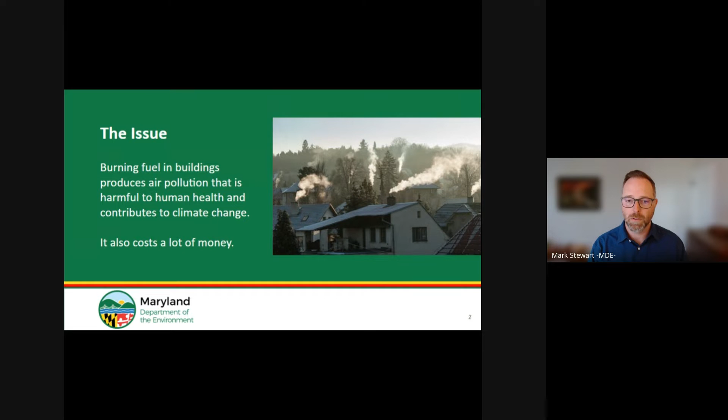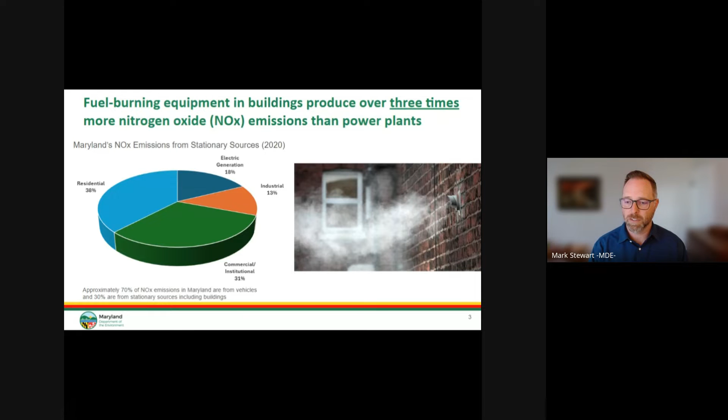And NOx and other forms of air pollution from fuel burning equipment harm children and adults in many ways, including shortness of breath, asthma, lung cancer, premature death, so on and so forth. Maryland is required to reduce criteria pollutants to meet increasingly stringent air quality standards and to protect the public's health.

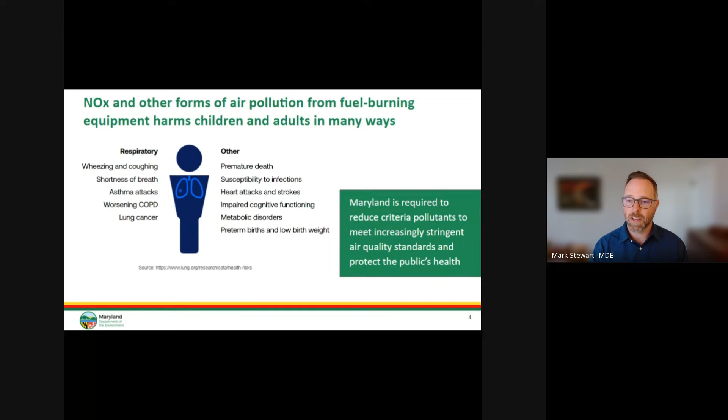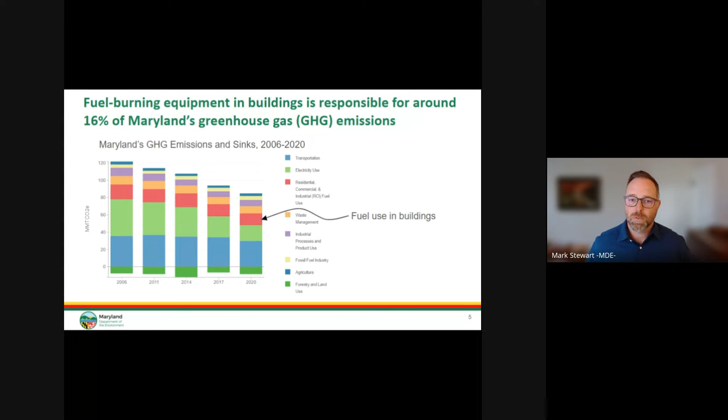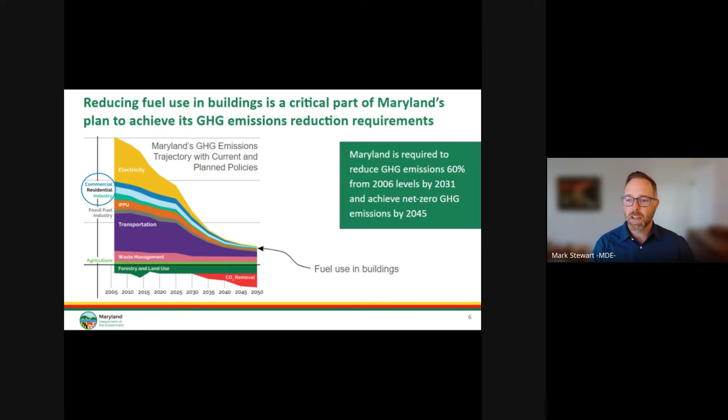Switching to climate change as the focus, we see that fuel burning equipment in buildings is responsible for around 16% of Maryland's greenhouse gas emissions. Reducing fuel use in buildings is a critical part of Maryland's plan to achieve its greenhouse gas emission reduction requirements. The state is required to reduce greenhouse gas emissions 60% from 2006 levels by 2031 and achieve net zero greenhouse gas emissions by 2045.

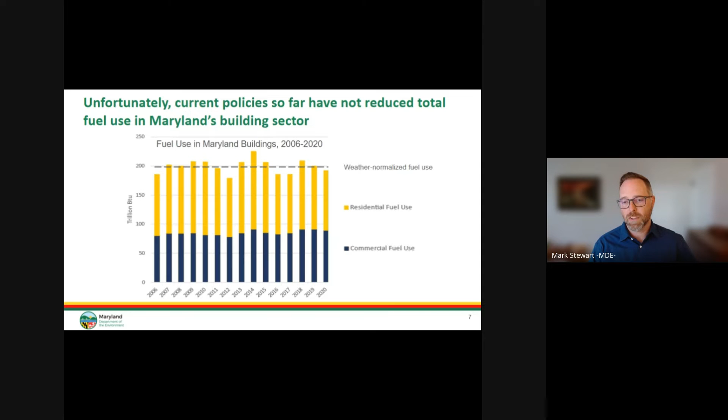And this is why several organizations have called for a stack of complementary policies to help accelerate the adoption of zero-emission technologies and reduce building sector emissions. These policies include clean heat standards and equipment emission standards, among other policies that the state has either already adopted or is also pursuing.

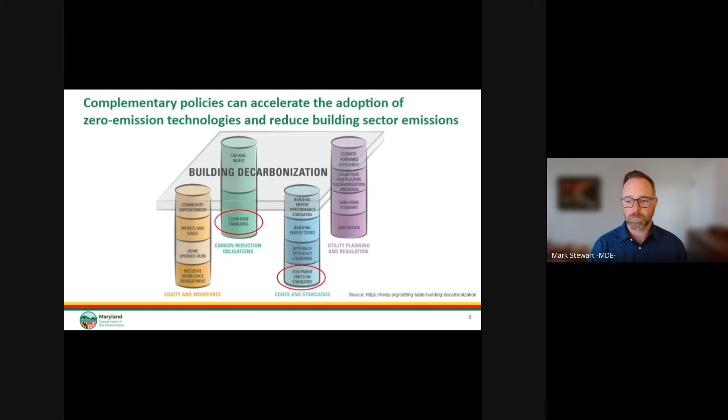These are also the reasons why Governor Moore has directed the Maryland Department of the Environment to propose zero-emission heating equipment standards and clean heat standards. Specifically, he requires us to propose a zero-emission heating equipment standard regulation that will phase in zero-emission standards for heating equipment to reduce carbon pollution and improve air quality inside homes and the ambient air, and propose a clean heat standard regulation to expand Maryland's renewable portfolio standard to the thermal energy system, mobilizing investment in clean heat solutions for homes and businesses.

The Zero-Emission Heating Equipment Standard and Clean Heat Standard address critical policy gaps. When we look broadly at building sector emissions, of course, many of those emissions are associated with the electricity that our buildings use. The state already has clean power policies that aim at reducing emissions from electricity generation, but those policies do nothing to reduce the direct emissions from buildings. We have an EmPOWER Maryland program that reduces both direct and indirect emissions from buildings, but not fast enough to meet the state's climate change goals.

We have a policy called Building Energy Performance Standards, or BEPS, but it applies only to large buildings that are responsible for around 10% of residential and commercial building emissions in the state. No existing policy focuses on small fuel burning equipment, as ZEHES will do, and no existing policy requires emissions to reduce fast enough to achieve the state's climate goals, as the Clean Heat Standard will do. Clean Heat Standard also provides additional incentives to help people achieve BEPS and ZEHES.

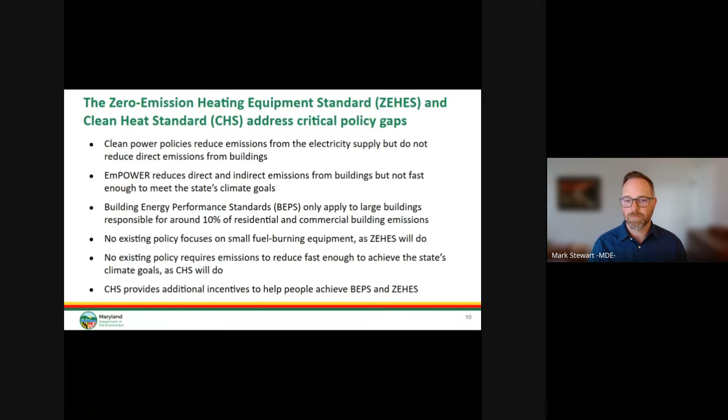So I want to first take a few minutes to walk through the overview of the Zero-Emission Heating Equipment Standards, which seeks to establish NOx and GHG limits for space heating and water heating equipment. I also want to note that MDE is very happy to have the support of NESCAUM, the Northeast States for Coordinated Air Use Management, and RAP, the Regulatory Assistance Project, that helped us design these policies.

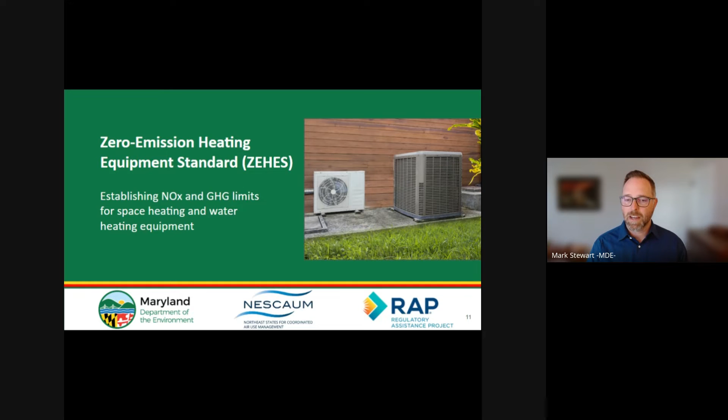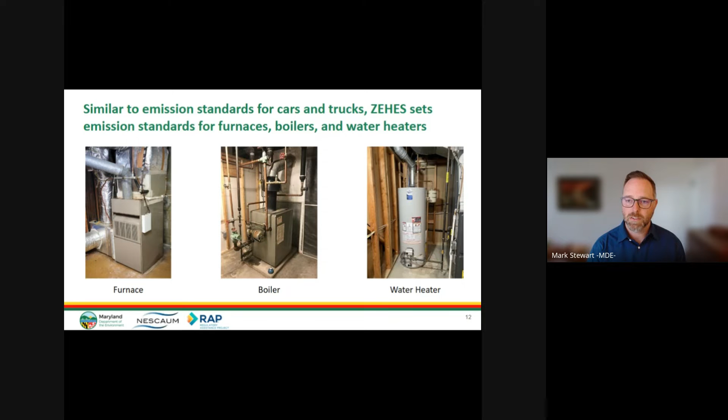Similar to emission standards for cars and trucks, ZEHES sets emission standards for furnaces, boilers, and water heaters. Zero-emission equipment like electric water heaters and heat pumps are already the best-selling heating systems in Maryland. I know I've had a heat pump here in my house in Silver Spring for the last 10 years, and it's been doing a great job of keeping my family hot and cold when we want it.

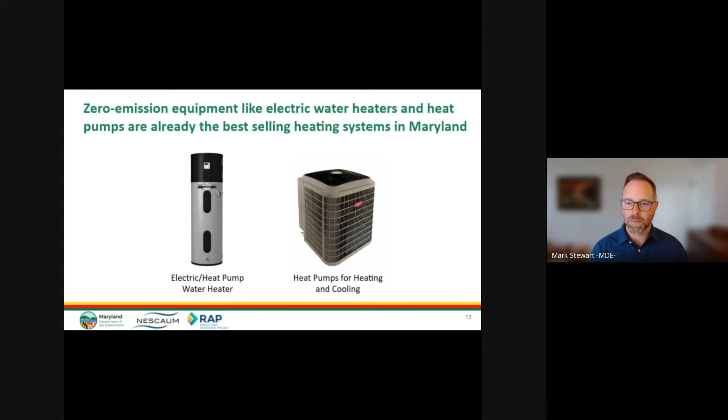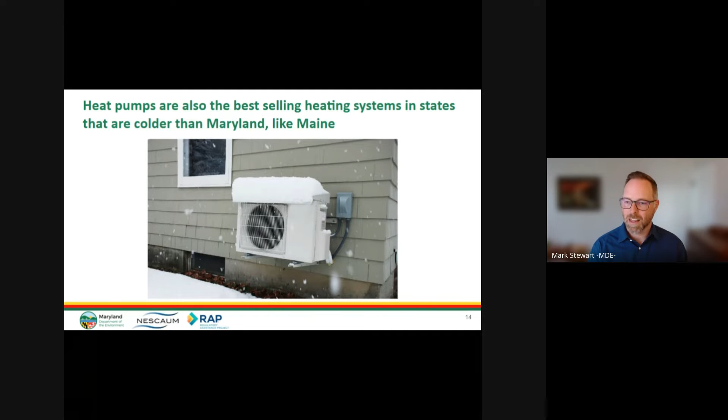Heat pumps are also the best-selling heating systems in states that are colder than Maryland, like Maine, which is an important factoid that we want to throw in here to dispel the myth that heat pumps don't work well in Maryland because of our cold climate. Canadians laugh every time an American says that heat pumps don't work here.

The benefits of heat pumps are many. It's one device for heating and cooling. A heat pump serves as both an air conditioner and a heating system, which can eliminate the cost of buying and maintaining separate systems. It's more efficient than an air conditioner. Heat pumps reduce cooling costs by around 18%. It's also more efficient than other heating systems. Savings can be greater than $1,000 a year on the heating side.

It reduces gas explosion risk. Sadly, Marylanders have died in recent years from explosions caused by gas leaks inside of buildings. Electric heating equipment can eliminate the need for gas service.

It improves air quality. Zero emissions from direct combustion inside and outside the building is one of the key features of efficient electric equipment. It improves occupant comfort. Heat pumps provide excellent temperature and humidity control, and they're heavily subsidized by the federal government.

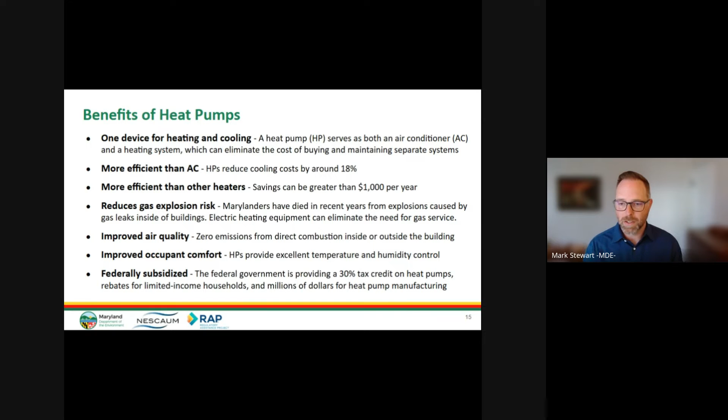The federal government is providing a 30% tax credit on heat pumps, rebates for limited income households, and millions of dollars for heat pump manufacturing. Investments that have all been made and will likely continue regardless of changes in the federal administration.

Heat pumps provide the lowest heating and cooling costs, and can have the lowest installation costs. Based on an analysis from NESCAUM's consultants at Energy Solutions, they find that Marylanders who use a heat pump for space heating and cooling save around $1,100 annually on average. Now that looks different depending on the heating system that you're switching from.

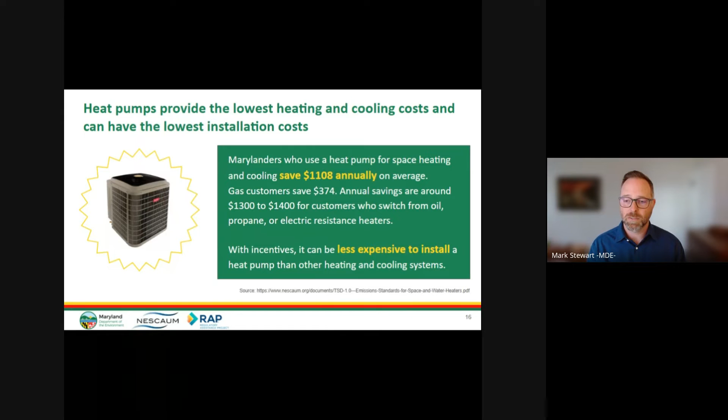Gas customers, people using gas furnaces, would save close to $400 a year when switching to a heat pump. The significant savings come from people who switch from oil, propane, and electric resistance heaters, where we see the annual energy cost savings increasing to $1,300 to $1,400 a year. With incentives, it can be less expensive to install a heat pump than other heating and cooling systems.

Heat pump water heaters cost less to install and operate than other water heating systems. Marylanders who use a heat pump water heater save on average $314 a year compared with using other storage water heaters. With incentives, it can be less expensive to install a heat pump water heater than other water heaters.

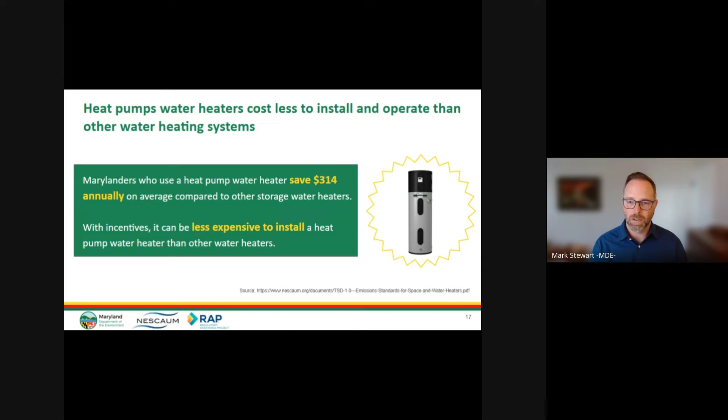When we look at some of those incentives, we see robust federal, state, and EmPOWER incentives that reduce the upfront cost of replacing fuel burning equipment with heat pumps. The federal incentives include a 30% tax credit, which provides up to $2,000 for all customers to install efficient electric equipment, up to $14,000 in electrification rebates for low and moderate income households, which will be distributed through a program that the Maryland Energy Administration will begin running next year.

At the state level, we provide 100% of the cost to install these systems in low-income households, up to the total budgeted amount in a given year. And we offer 0% financing for up to 24 months through the Maryland Clean Energy Center and other lenders to help people finance clean energy solutions.

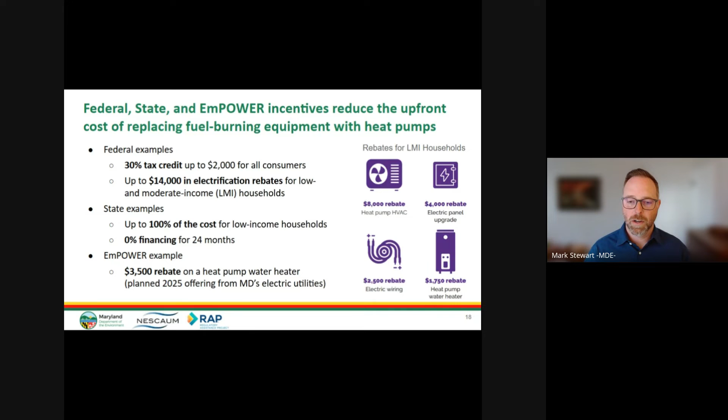We also see that the utilities are preparing to roll out some really robust incentives for Marylanders who are covered by the electric utility EmPOWER programs, including, I think from all of Maryland's electric utilities, a proposal that would start next year providing $3,500 toward the purchase of a heat pump water heater. And that's just an example of the type of electrification incentives that the utilities have proposed that are in front of the Public Service Commission currently.

The zero-emission heating equipment standard will significantly improve public health in Maryland. We see total health savings amounting to nearly $2 billion by 2045.

More than 100 premature deaths avoided, more than 200 ER visits avoided, more than 26,000 work loss days avoided, nearly 700 asthma cases avoided, and more than 4,000 lung cancer cases avoided.

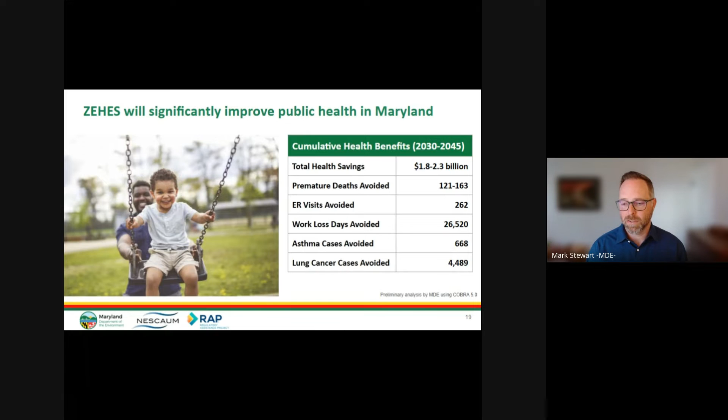These are among the reasons why we already have 3 states, including Texas, Utah, and California, that have already adopted low NOx standards for water heaters, and at least 10 states that are considering zero-emission heating equipment standards.

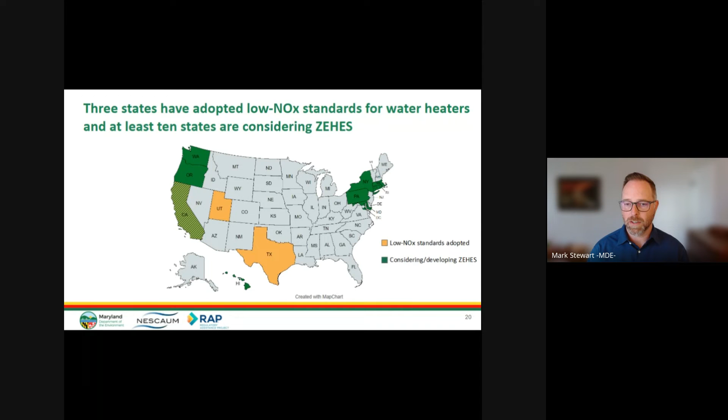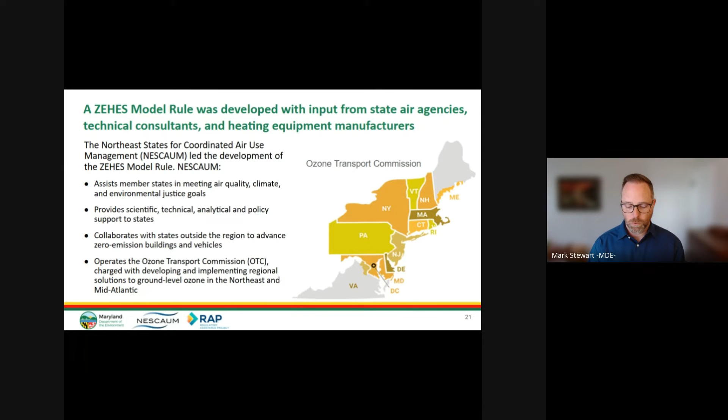As I mentioned earlier, we worked with the Northeast States for Coordinated Air Use Management, or NESCAUM, on the development of a model rule. They had the Mid-Atlantic and Northeastern states squarely in mind as NESCAUM led a process working with state air agencies, technical consultants, and the major heating equipment manufacturers to develop a model rule that could be adopted by all of the states in our region, and possibly beyond this region as well.

So when we look at the model rule requirements, the easiest way to talk through this is to say that the model rule would set a zero emission standard for furnaces, boilers, and water heaters that run on oil or propane, beginning in 2029. There's no low NOx requirement for furnaces, boilers, and water heaters that run on oil and propane because the industry isn't quite ready to roll out that type of equipment.

Where we do see low NOx standards introduced is specifically and only for gas water heaters. So in the small equipment category, in the small gas water heater category, we would have a step that would possibly phase in 2027, where newly manufactured and installed small gas-fired water heaters would have to achieve ultra-low NOx standards.

And the reason that we're able to move toward that ultra-low NOx step is because this type of equipment is already readily available. The manufacturers are producing it for the states that I mentioned previously, and could shift some of that supply to Maryland.

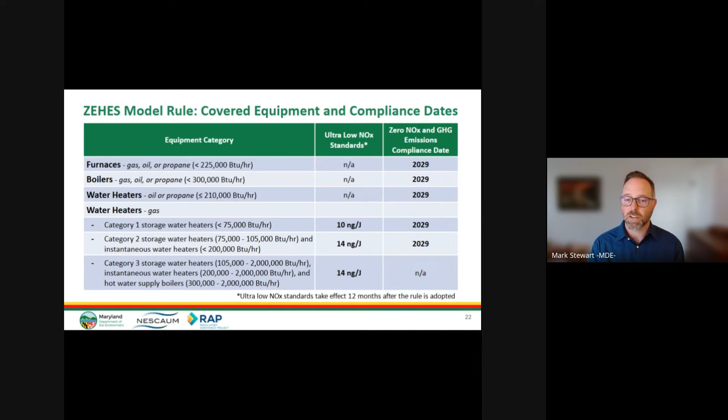The model rule also allows for temporary installation of non-compliant equipment. It contains a provision allowing the temporary installation of non-compliant equipment to provide the sufficient time that's needed to complete necessary building modifications for the installation of compliant equipment. Non-compliant equipment can be installed for up to 6 months to allow additional time for permitting, electrical upgrades, etc.

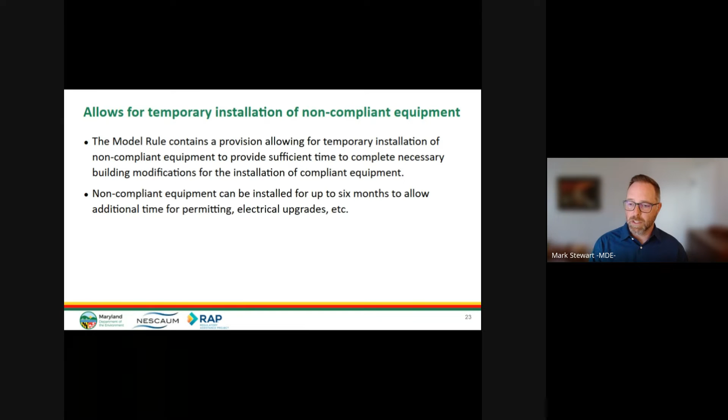In other words, if someone's heat goes out and it's the winter time, a contractor could come and restore your heat the same day, even if that means taking out a busted furnace and putting in a new one. But within 6 months, they would need to return to finish the electrification upgrade to provide the zero emissions equipment.

As a quick overview here, when would the ZEHES requirements take effect? If MDE were able to adopt a regulation by the end of 2025, then in 2027 new gas-fired water heaters sold for installation in Maryland would need to meet the ultra-low NOx standard starting that year. In 2029, new small furnaces, boilers, and water heaters sold for installation in Maryland would need to meet the zero-emission standard starting that year.

And where does all this lead? That means we would be putting standards in effect around the end of this decade. The transition period then really occurs through the 20s and 30s. Over the next 20 to 25 years, we see that most heating equipment would be gradually replaced with zero emission or ultra low NOx heating equipment throughout the next 2 decades.

But people can also decide to keep their existing equipment running through or even beyond that period. There's nothing about this rule that would require the replacement of functional equipment. All equipment could continue to be maintained. There are also types of equipment like direct heaters and fireplaces, other things that are not covered by this. So there's a wide range of options still for consumers.

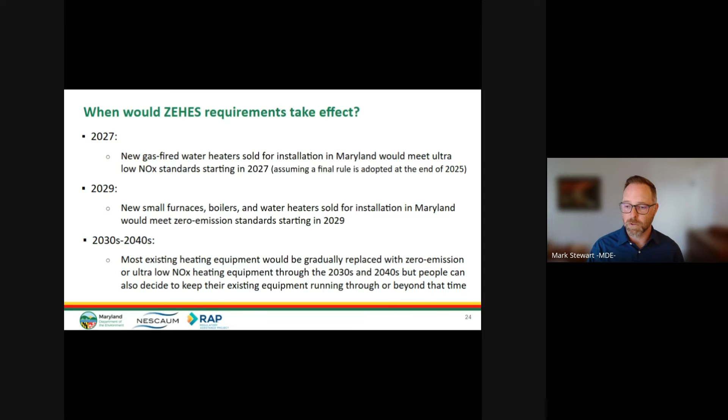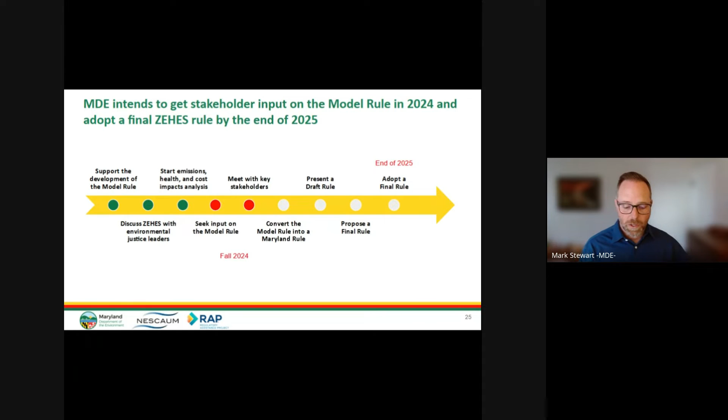Here's a snapshot of our rulemaking process. We are at the point now of trying to get stakeholder input on the NESCAUM model rule, and then to utilize that input to develop a Maryland-specific rule that we would propose next year and hopefully adopt by the end of 2025.

So with that, we'll give you a quick overview of the clean heat standard. And then, as Zach mentioned at the beginning of this call, we'll have time for some questions and answers as we go here. So the clean heat standard requires building sector emissions to reduce at the pace required to meet Maryland's clean air and climate change goals and helping people save money.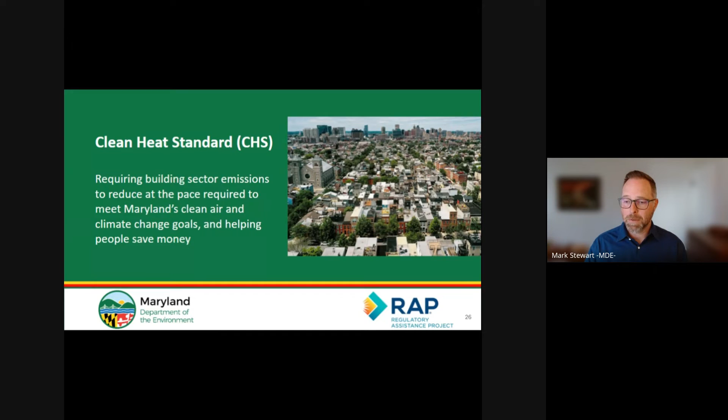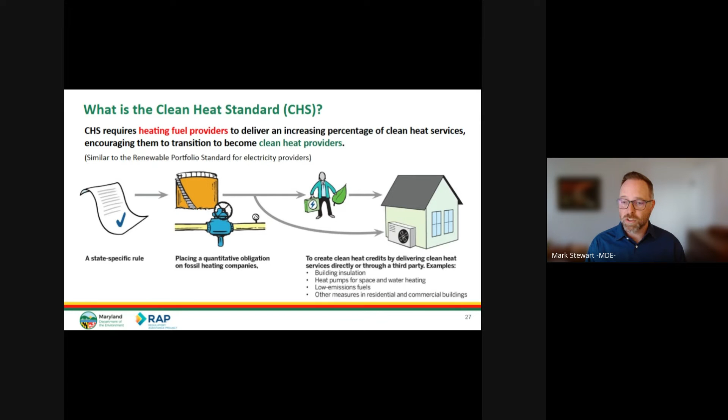So what is the clean heat standard? It requires heating fuel providers to deliver an increasing percentage of clean heat services, encouraging them to transition to become clean heat providers. In some ways, it's similar to what's called a renewable portfolio standard that obligates electricity providers to provide the electricity delivered to all of us here in Maryland from increasing percentages of renewable power sources. In a similar way, this is a state-specific rule that would place an obligation on the fossil heating fuel providers to deliver increasing percentages of clean heat services, which could include building insulation, heat pumps, low emission fuels, and other measures that reduce building sector emissions.

So who's obligated under this? The pipeline gas utility companies and heating fuel distributors, including those that distribute fuel oil and propane. Those entities would have the opportunity to earn clean heat credits for the delivery of clean heat services to Marylanders. They would need to retire enough credits to meet annual obligations to reduce greenhouse gas emissions. And they could also outsource their obligation if they wanted to.

Third parties like HVAC contractors and housing providers have no obligation under this, but they could earn clean heat credits and sell them to obligated parties. And building owners and residents are not obligated, but they could benefit from receiving clean heat services from the clean heat standard.

The actions that earn clean heat credits include weatherization projects like adding insulation or air sealing, installing zero-emission heating equipment, or switching from fossil fuel to alternative fuels like biofuels or hydrogen.

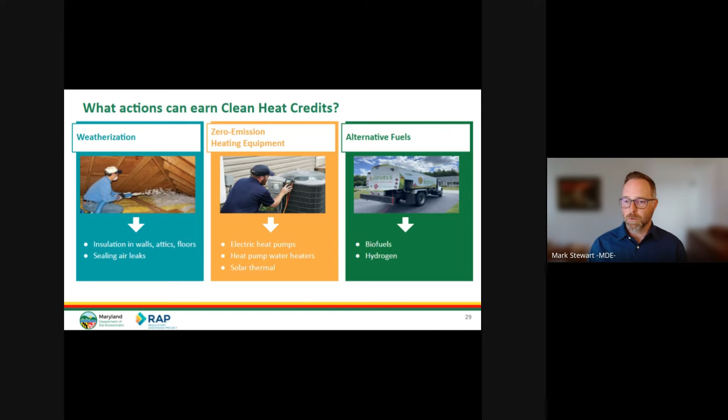Equity is a really core component of a clean heat standard. There's a requirement that ensures low and moderate income households benefit from clean heat services, and that supports weatherization and heat pump installations that help reduce household energy costs, especially for households experiencing energy burden in our state.

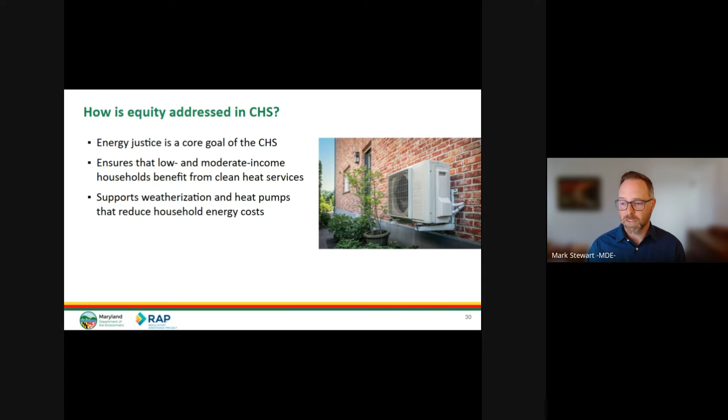So when would this begin? If we're able to adopt a phase 1 regulation in 2025, then obligated parties would begin reporting data to MDE in 2026. In 2026, the obligated parties would also have the opportunity to begin earning early action credits. The program would really, at the earliest, get started in 2027.

That's when obligated parties would begin registering, either directly or through a contractor, enough clean heat credits to meet their annual obligation. And that's also when consumers would likely begin receiving additional information about, or maybe even incentives for, clean heat services.

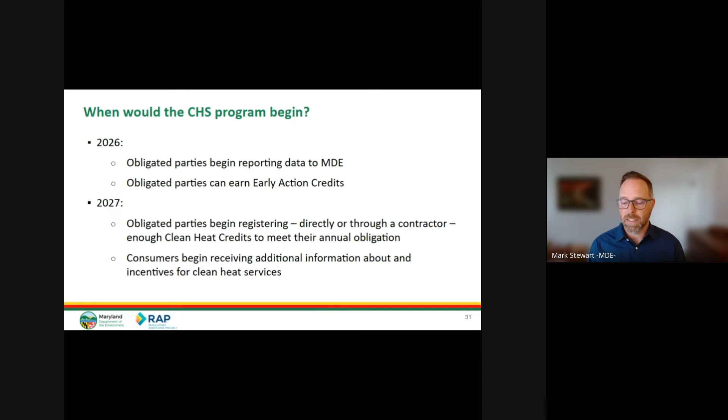We see that a clean heat standard has many benefits. It sets a clear, predictable, long-range schedule for Maryland to transition from fossil heat to clean heat. Obligated parties are motivated to promote the lowest cost options for deploying clean heat measures, such as promoting existing incentives. It supports other policies and provides incentives to help building owners pay for ZEHES and BEPS.

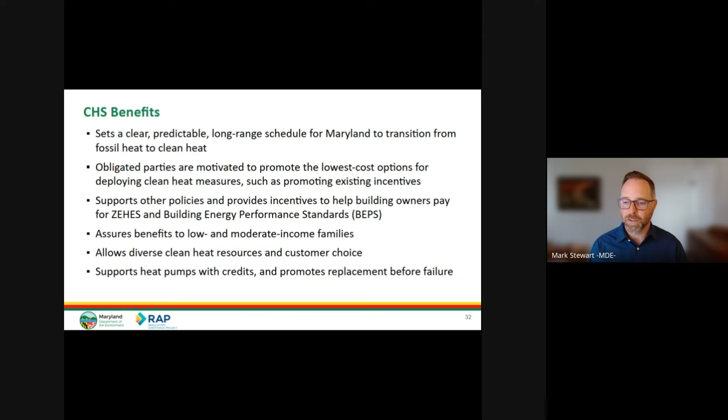It assures benefits to low and moderate income families, allows diverse clean heat resources and customer choice, and supports heat pumps with credits and promotes replacement before failure. These are among the reasons why we see at least 10 states, including a cluster of states in the Mid-Atlantic and Northeast, developing or considering developing a clean heat standard for themselves.

MDE intends to adopt a clean heat standard reporting rule in 2025 and adopt credit holding requirements in 2026. We're at the point now of collecting stakeholder input on the basic idea of a clean heat standard and the basic architecture of a program, as well as, in a couple of weeks, starting to get input on some of the reporting requirements that would be proposed next year.

The goal is by the end of 2026, so more than a year out from now, to complete the rulemaking and adopt a full, two-part regulation to establish a clean heat standard.

I want to address a few frequently asked questions because we've been getting public input on building decarbonization and other decarbonization policies for several years now, and a few things keep coming up. Will using a heat pump increase my energy costs? Good question.

Excuse me, let me drink some water here. Sorry, I'm battling a cold.

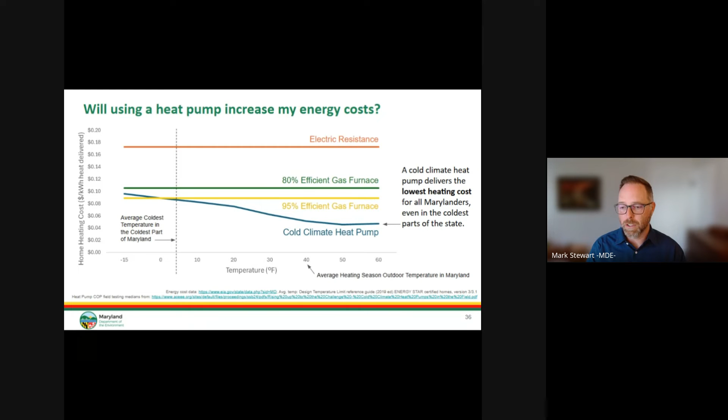We also see that with the cold climate heat pump, it's able to provide the lowest cost heating even at the lowest temperatures we typically see in Maryland. There is a chance you get a wicked cold night or a bad cold snap, and that's where the cost of running a cold climate heat pump becomes comparable to running a furnace. But for all the other warmer hours of the year, which is the majority, the heating cost from a heat pump is significantly lower than other equipment.

Another question we get: should we rely on electricity alone to heat our homes? Good question, but we already rely on electricity to power our devices, including furnaces, and we have a very reliable electric grid in Maryland. We're already dependent on a stable electricity supply.

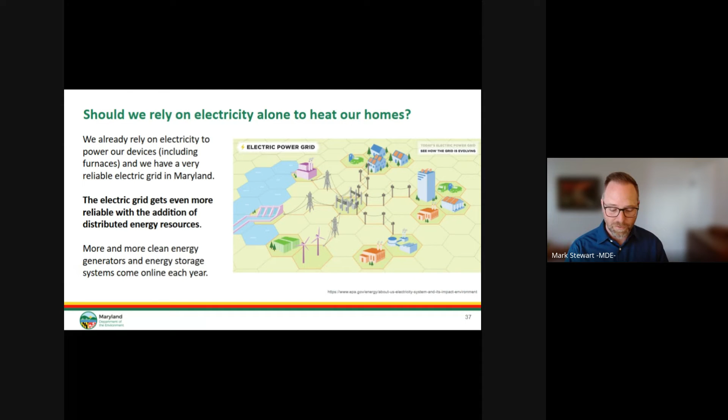The electric grid gets even more reliable with the addition of distributed energy resources. More and more clean energy generators and energy storage systems come online each year. We also note, again, that these policies have no impact on you continuing to use alternative types of backup heating systems that you already may enjoy in your home.

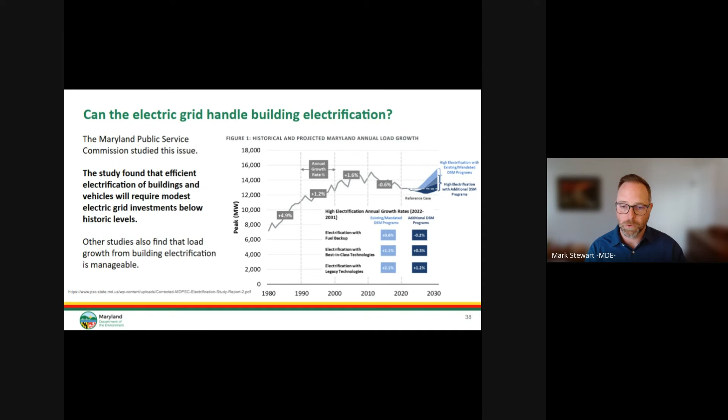Can the electric grid handle building electrification? The Public Service Commission studied this issue. The study found that efficient electrification of buildings and vehicles will require modest electric grid investments below historic levels. Other studies also find that load growth from building electrification is very manageable.

I want to turn it to Becky Price from the Maryland Energy Administration to go over some details about the resources that MEA has to help people transition to a lower cost, lower emissions future.

Awesome, thanks Mark. And I also am battling a cold, so I hope you're feeling better. And if anyone else on the phone has a cold, I'm sorry.

Thanks, Mark. As Mark said, and Zach said as well, I'm over at the Maryland Energy Administration, which is the Maryland State Energy Office. We have a mission to promote clean, affordable, and reliable energy and greenhouse gas emissions reductions to benefit all Marylanders in a just and equitable manner. We do this through a variety of policy and programmatic offerings, including the distribution of grants, rebates, and financing for a variety of audiences, including businesses, households, community groups, organizations, and local governments.

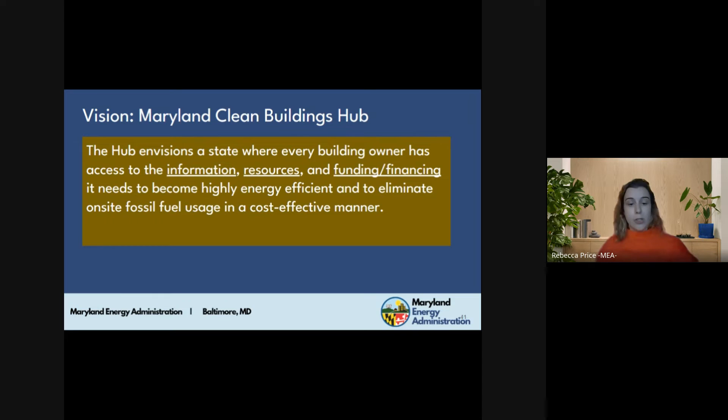So I've been talking about this Clean Buildings Hub within MEA, and it may sound somewhat nebulous right now, and that's because we're currently working on building it to be the best resource for Marylanders that we can. We've done a ton of stakeholder engagement over the last year to understand the types of information folks seek and resources they need. In the meantime, we have a few ways to get information out to you.

Kind of the most immediate is by signing up for a newsletter, which if one of my MDE colleagues could drop in the chat. You'll get information like MEA grant programs, updates on the IRA rebates, updates on Empower, and updates on what's going on at the federal level.

We also have some pages on MEA's current website, which if we could get a link there, awesome. We're simultaneously working on building our own independent website that's going to house all of this information, as a first stop as you're navigating this. The immediate ask is to sign up for that newsletter, and we'll let you know when that bigger, more integrated website is ready.